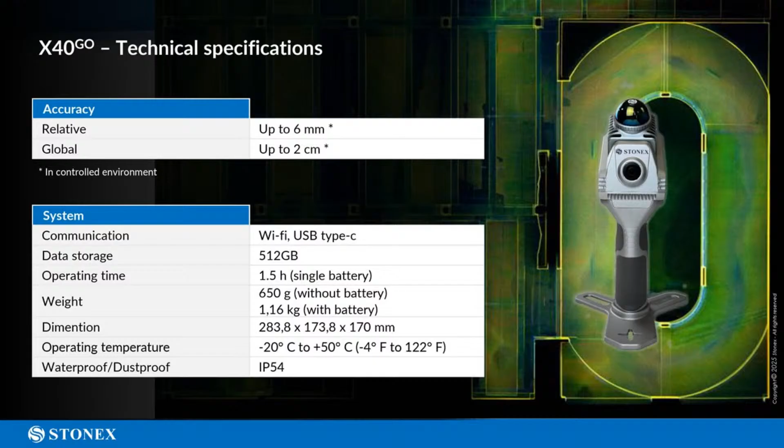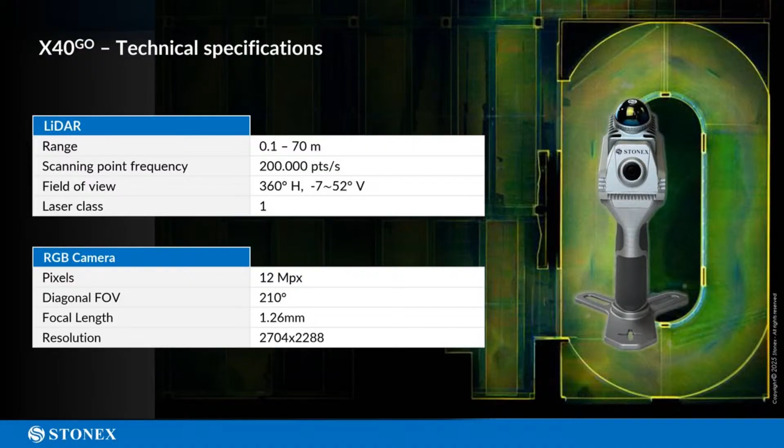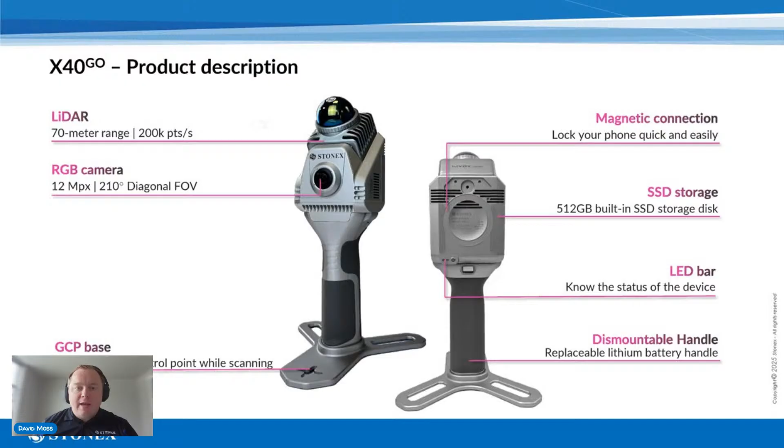So the X40, 70-meter range, and the X70 also 70-meter range - the names don't necessarily mean the distance, apologies for that. But 200,000 points a second. This one's extremely light - our lightest, simplest, easiest to use, weighing only 2 pounds. Colorized point clouds, built-in SSD. The battery, the handle is the battery. All of our units have a little ground control base, so you can tie in any kind of total station or GNSS shots, which is a pretty cool feature. It really ties in the control, and not only references your point cloud, but you can also do what's called a non-rigid adjustment. So say you had 10 total station shots all across - you can actually put those back in, say I know exactly where these are, and it'll redo it and improve your whole algorithm. All of our scanners support that - I can't preach enough about how cool a feature that is. You don't necessarily need RTK on board - there is an advantage to that which we'll talk about - and of course for indoor scanning it's a little different.

200,000 a second - this is our entry level, starting at $18,000, which is very attractive. When I first started selling these things over 5 years ago, the cheapest, at 43,000 points per second, was in the $40,000 range, with a $3,000 a year subscription software. So in 5 years, the entry level has dropped in half, and they're just better performing - simple as that. At that point, the 43,000 one didn't even come with a camera. Wearables had very low density and only about 30 meters usable range. So they're getting much better. If you tried one out a couple years ago, this is rapidly expanding and increasing by the day - super important.

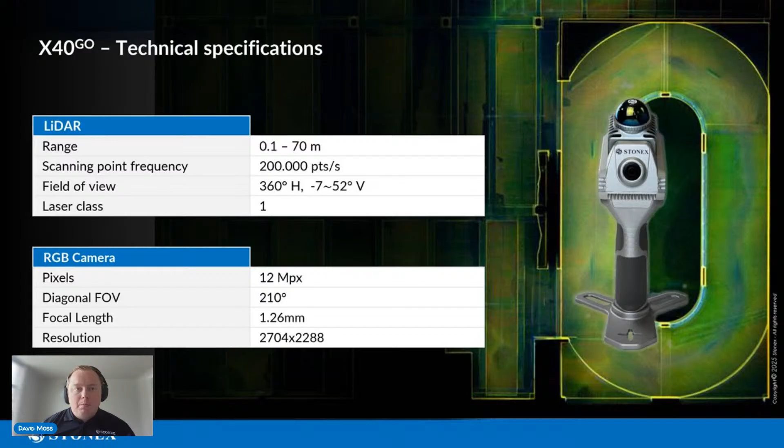So relative, local accuracy is definitely sub-tenths of a foot, and global up to 2 centimeters - we're very conservative on that. You have people preaching SLAM solutions claiming half a centimeter. I wouldn't call that realistic. I'd say sub-tenths of a foot is easy to get, and of course you can get tighter control with other methods, but centimeter level accurate solution, no doubt about it, from all our solutions.

So all of our units have Wi-Fi, you can use them with the app, makes it really easy to use. I mean, 1.16 kg, so a little over 2 pounds. All of our scanners have 512 gigs on board, and that's probably several hundred scans - you're good on there.

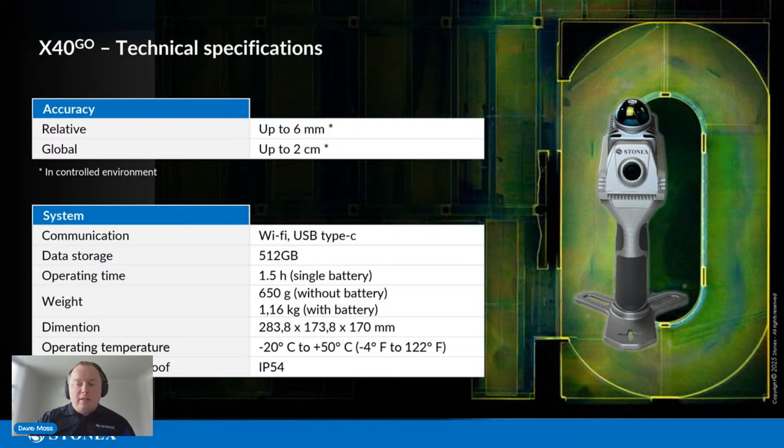We'll go to the 70. So the 40 and 70 look very similar. The 40 is a fixed head solution, the rest of our three are rotating, so the X70 rotates. Same laser, but there's two, I guess three differences. One, the head rotates 360 degrees, so you get a little more, easier coverage. It's spinning all around, kind of nice.

This one is pretty unique in that you can put it a little bit over your head and it's constantly scanning 360 all the time. All these scanners, like the 40, 120, basically everything on the market, are constantly scanning yourself, but they know how to take that out of the equation. On the 70 it's very unique, you put it over your head and constantly get 360. Same 200,000 points a second, but that's really nice.

We also have a second camera for the visual SLAM, so it has two cameras to help the algorithm itself. If you're in a very dark environment you can still use the solution, but it can enhance the algorithm a little more, same color camera. The 70 starts to get into where we can support our RTK module and a couple more accessories than the 40, which is entry level.

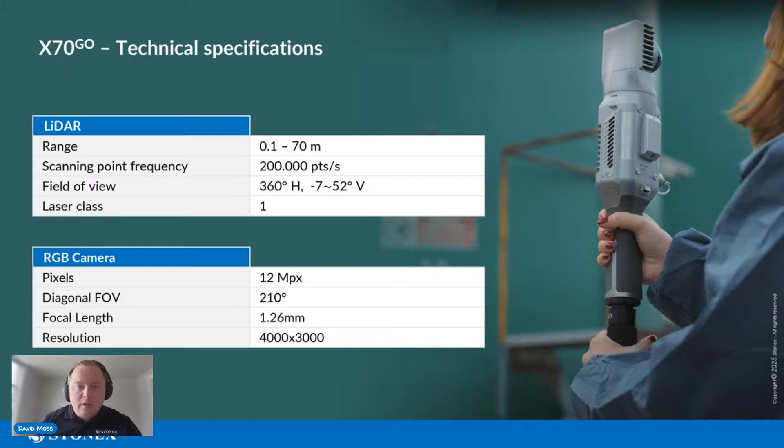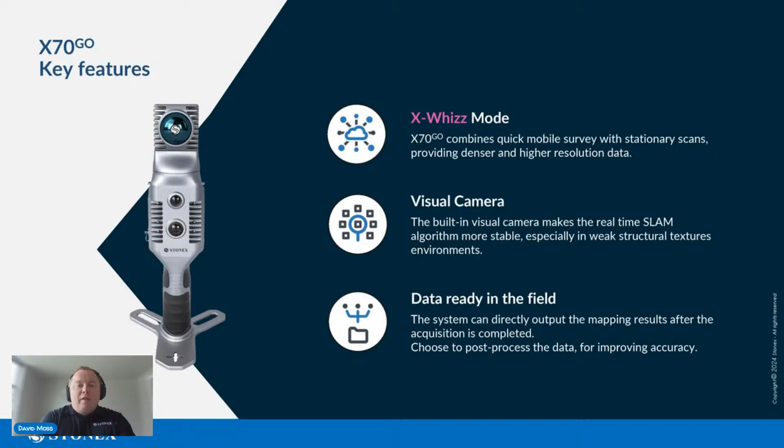So let's go to the next slide. Same head, but very unique in the sense you can stick it over your head. We also have what's called the X-Whizz mode, which is awesome - you can basically do a stationary scan up to 80 seconds long, provides a much denser point cloud. You can have that as a static file, higher resolution data. I wouldn't necessarily say it's a groundbreaking accuracy difference, but if you need really enhanced color of one facade of a building or one entrance, you can set it down for that. We have a tripod accessory that comes with the kit - that's really cool, we'll show that more in a second.

So the 70 rotates around, has the 360, it has the second camera, and it can do the X-Whizz, which further enhances the color and resolution, or density I should say. Same LiDAR, it's a Livox Mid 360.

It's also very important - I can't stress enough about just the SLAM algorithm itself. Most of these things use the Livox or Hesai sensor, so the hardware is not unique. I mean, there's things like IMUs and some other stuff that are important, but it's all about the algorithm. You can have the greatest hardware in the world, but if you don't have a strong algorithm that's going to work in all the environments you need it to, it's not worth anything. Hardware is nice - better cameras, more density, and all that - but if you just have fancy hardware without something to back it up on the software side, it really doesn't matter. We're really proud on both fronts, hardware and software.

So to recap, the 40 and 70 both have 70 meters of range, 200,000 points per second, which is an absolute ton, but in the grand scheme of things it is kind of low density. So with that range distance, I'd say these are more short range, more indoor scanners, a little less versatile. Of course on the 70 we can do the RTK, but then we go into our 120, which features a Hesai 16 channel XT16 sensor.

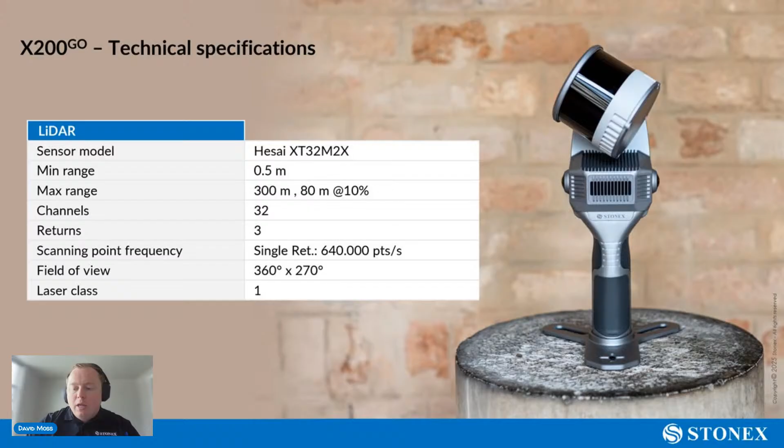Love that. All of our products use a class one eye-safe laser. Nothing on there is going to ruin your phone camera or your eyeballs, nothing like that, just different wavelengths. I'll say there's a new Volvo 3-row electric SUV that has a LiDAR sensor which can actually fry your camera, which I'm having some questions about. So all good here, these use different wavelengths, still LiDAR, but different. It's just enough class one eye-safe laser all around the board.

Same kind of accuracy - I'd say the best accuracy, best density. Our best overall solution is our flagship, the X200. That does drop a little bit on a drone, just from the nature of SLAM being in the air.

This is a better photo of our solution, with the little antenna spot for the antenna you can see.

All of our units have built-in batteries. They're pretty affordable as well. The handles all work for about 90 minutes to 2 hours, but you can keep swapping them out. They all charge on USB Type C, which is very cool, very easy - you can plug it into the truck, plug it into your power bank, and keep going. You probably don't need more than two batteries. Nothing crazy, and you can use your same phone charger, which is great.

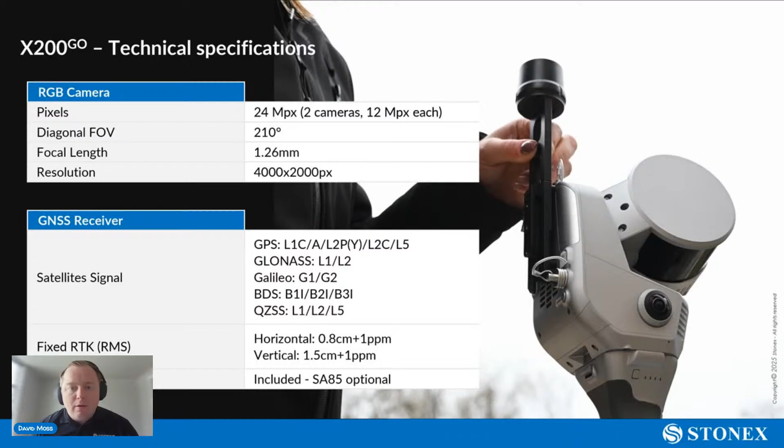So again, built-in RTK GNSS, fantastic, awesome, and the panoramic images - super, super cool. And we even have a better antenna when you're using the backpack configuration.

All of our units have real-time preview, real-time colorization. You can see that in 2D and 3D, which is really cool. So you see your trajectory, you see what you scanned, you can make sure it's all good before you leave - you got everything that you needed.

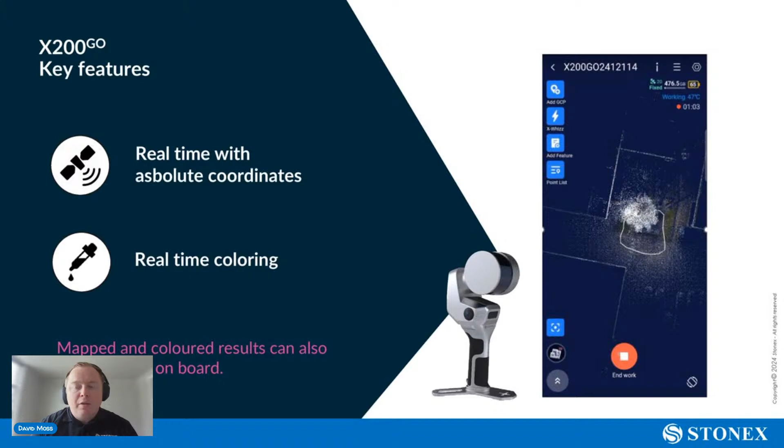On our 200, you can get a colored reference solution right out of the gate - you just take it right off, no post-processing needed. Of course the post-processing will do more of the global SLAM and some filtering and optimization. But if you just want something quick and dirty in the field to see what you got, you literally leave it on for another minute or two, make it beep, and you can pull data off right there - you have a point cloud right there in the field. Super, super sweet.

Again, X-Whizz mode, really cool - stationary scans, anytime you want higher resolution, more density. I mean it's 640,000 points a second. Not as much, but anytime we can get better colorization, why not take it?

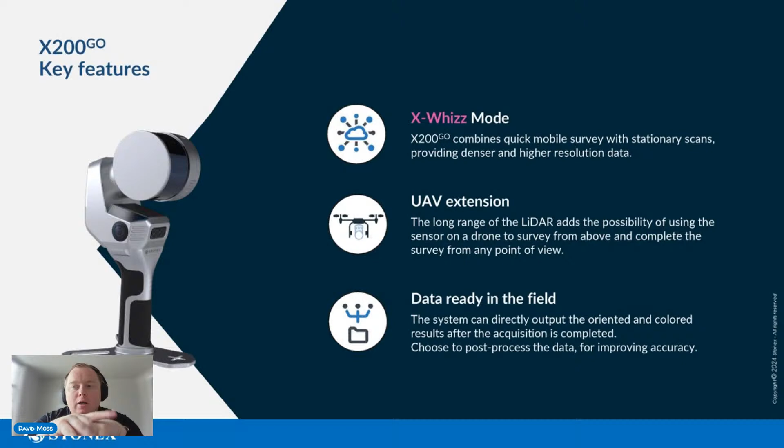UAV - so again, I can't stress the versatility. These things are getting so cool. Drone, vehicle, handheld, backpack, on the tripod, walking around - getting lighter, better by the day.

Another fantastic thing - most of the survey world runs on Android. Pretty much all our solutions are Android based, but what's unique and stands out in a 3D space is all of them work with iOS. So you can download it on your iPhone, use the app preview on there. You don't need a sophisticated data logger, nothing special there. We're not getting you to buy a big survey controller or anything - you can just literally use the ones on your phone. Free of charge, of course, no subscription to anything in the 3D world.

Our post-processing software is called GoPost. Most everything - making your cloud, referencing with the RTK - it's our one-click solution. You just load in the data, one click, say you want color or don't want color. We have moving object filters, so moving cars, moving people - we'll filter that out, and some other things, but essentially it's extremely easy.

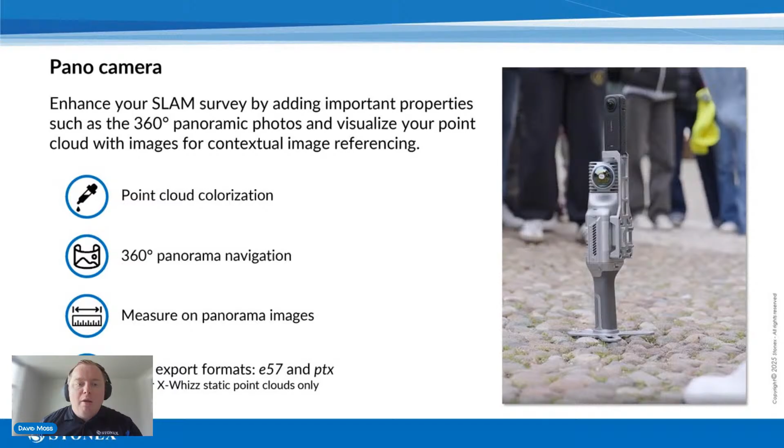So we have X-Whizz, put it on there. Again, we supported the X5 right off the bat, and the X4 - awesome cameras. We also have geotags, which is really cool. If you're not using the 360, or you just want to highlight something, a colorized mobile point cloud is not going to get every little detail. So you can take photos of things of interest and have them referenced in the point cloud and view them in GoPost and other software. That's really cool - a fire extinguisher, for example.

One example that came up recently: they wanted every single door labeled with the room number. Having quick access to that is really cool, and knowing more about the space you're in - any kind of notes you want to take on site in the middle of the scan. It only takes a second, using the built-in internal camera.

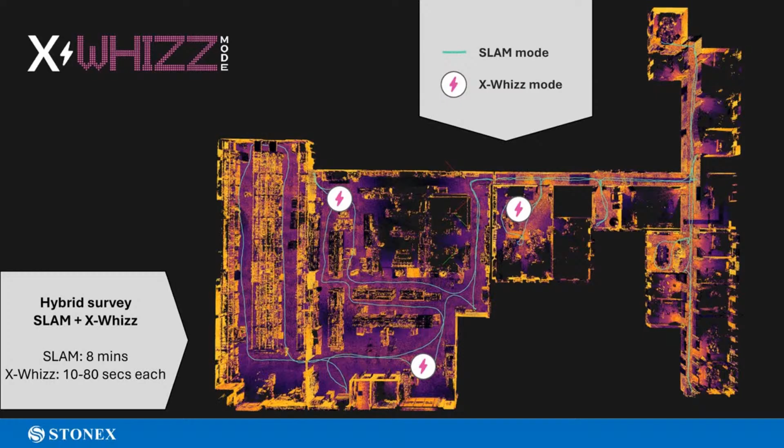Really cool on there - you can see how you can mix X-Whizz, our static mode, with the SLAM. For a whole floor of a building, you're going at say 75% walking speed. The slower you go, the denser it is, but overall for density versus speed, 75, 80, 90% of your normal walking speed works well. You're not walking at a snail's pace - especially outdoors with the X200, you can walk at your normal pace and get great density, great results.

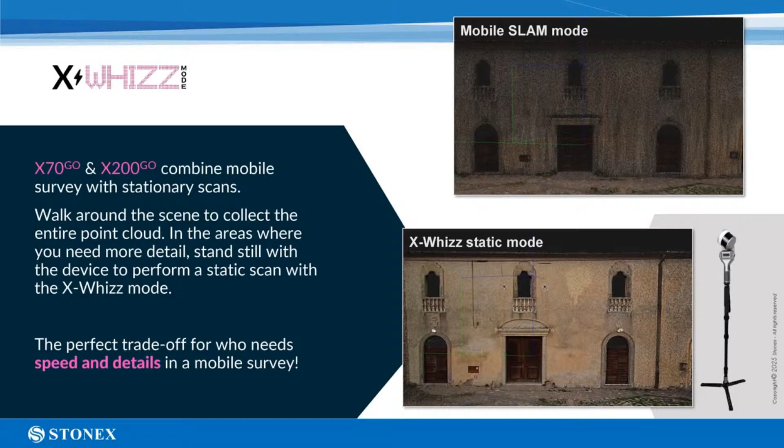This shows the difference between just a mobile-only solution versus the X-Whizz. Our color is actually better than that photo represents, but I just wanted to show how the X-Whizz really makes it pop. So anything that you need - I have the tripod mount if it needs to be mobile.

Our X200 solution can be flown on a DJI Matrice 300 or 350, controlled from the Go app, and we're tying in RTK. We're getting color on the drone with the SLAM, though not the same as dedicated navigation-based solutions like the X-Fly. So it's more of a complementary tool - not a full-fledged drone LiDAR scanner, but more like a SLAM handheld that can also do the drone, among other things.

So, accessories - panoramic camera and all of them support a shoulder hook. If you're doing it all day, especially with the X40 which is less than 2 pounds, it's not really bad for most things, but you'll want the shoulder hook and a tablet mount. I want to stress these things aren't heavy - we're not a 20-pound wearable like some others on the market. We also add a backpack, tripod, and tablet holder, so you can do it all in one.

You can use it other ways, but the RTK module straps on there too. From the 120, same things, but of course vehicle mount too, which is very cool. You don't have to use GNSS with that, but vehicle and RTK - reference, especially outdoors - can enhance the solution, not just reference it. If you get into a not-so-great SLAM area, it can help keep your trajectory among other things.

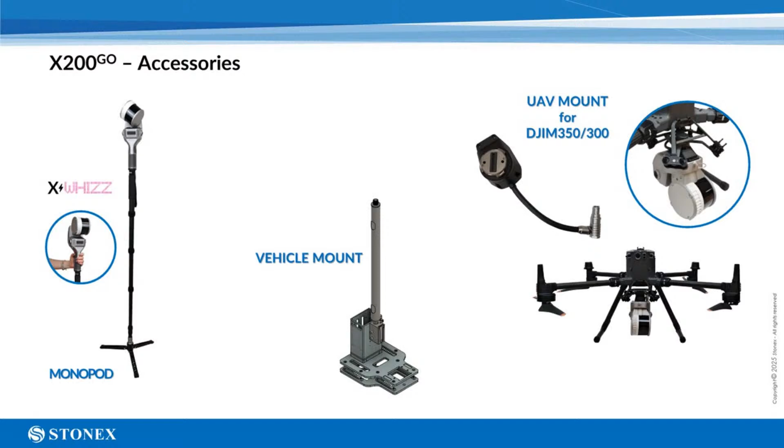But let's say you put the GCPs and all that - we've got that full-fledged, same thing with the X200. Just kind of ran out of space, but we don't need an RTK module because it's built in. The pano camera doesn't support that because it has one just as good built in as well. When we do the UAV mount, we can also do the backpack for here too, with the tablet. Oh, there's the photos - I forgot to put it in. Oh yeah, really cool as well.

We can tie into our radio, so not only getting reference from internet connections - I mean there's things like Starlink and other stuff - but if you just want to run a traditional base rover, we can use our radio as well. Put that radio in your pocket, nice and light. So we have a built-in pano, and you can use the other one in the future if you want, but it's probably a little overkill.

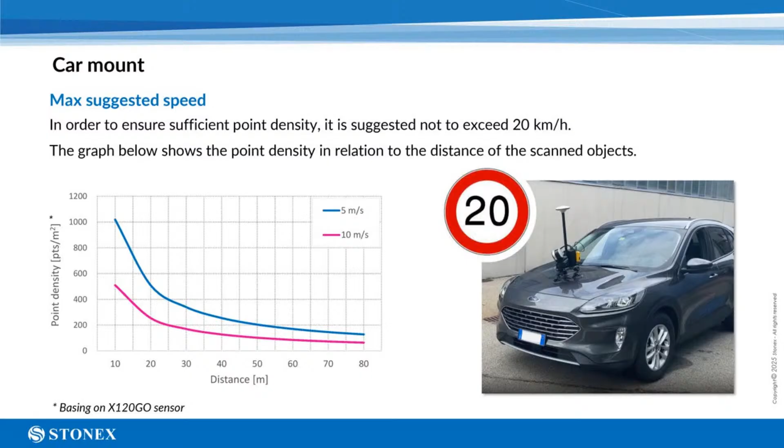On a vehicle - we talked about these things being used at walking speed normally, but on a vehicle you want 5 to 10 meters a second, 10 to 15, 20 miles an hour, 20 kilometers. That's what you want to keep it under for the sake of density. That's based on the 120, so it's a little faster than the 200. So to sum things up: the 40 and 70 are more indoor, while the 120 and 200 are more versatile indoor and outdoor solutions with more accessories.

We all have storage, a bunch of storage there. Our 200 has a built-in RTK receiver, our X-Whizz has a better colorization mode, built-in 360-degree camera, can be flown on a drone or used as a scanner on a vehicle. RTK ties into any kind of survey nail or target, total station, or GNSS. We can get simple point clouds right off the scanners - of course you'll probably want to post-process for most things - but it's really easy to use, and it comes with a fantastic, strong SLAM algorithm that we're very proud of, plus free software to boot.

That's a lot there. We also have other solutions we'll talk about in a moment, but just more about the accessories - basically to sum it up: indoor/outdoor versatile with the 120 and 200, more indoor or close-range outdoor with other solutions. We're starting at $18,000 with software, end user price. So fantastic there - so which one should I use?

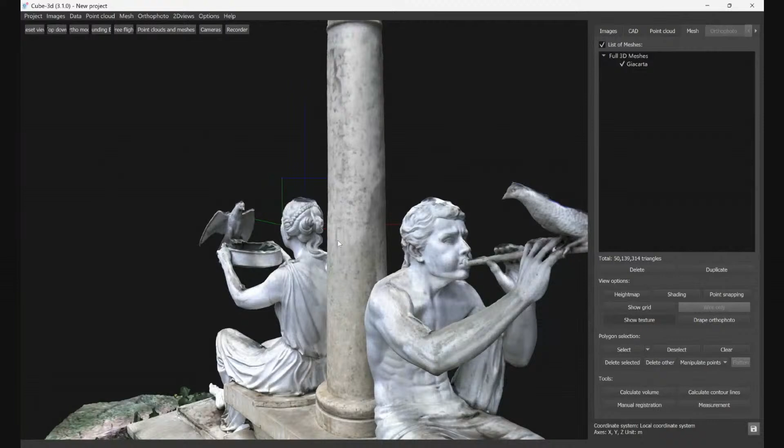I'd call this a complementary tool rather than a replacement for a mobile or terrestrial scanner, because it's more for close range, things like this, due to the nature of visual SLAM. It can't hook onto flat objects — things like mirrors can mess it up, blank walls, that sort of thing. You have to use it in a well lit environment, unlike a regular LiDAR SLAM scanner.

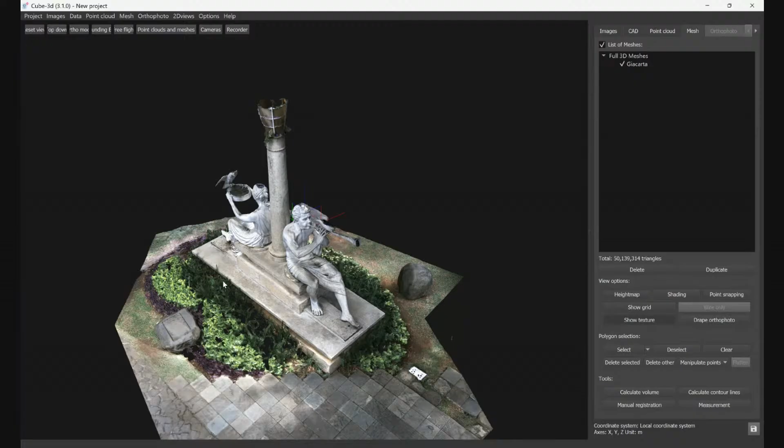You can use it in an underground pitch black mine. You can use it at night. The data itself isn't affected. So that's where I call it complementary.

But look at this, it's crazy — nothing to it. Walk around one time, tie in the targets to survey control to get it to scale, and it's just insane. You can use this for facade reconstruction — you just need one facade of a building for extra color. There's a ton of uses here for showing off our SLAM solutions.

I did this in under 5 minutes with all of them, all of our three SLAMs. On the 200, I did this one last, so you'll see a little bit more of the shadow.

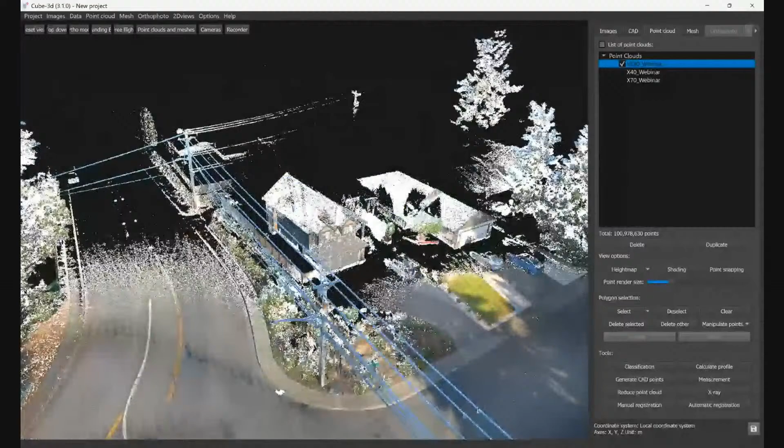This was done at sunset, but we're getting our curb — good curb data. Again, this is within 5 minutes and we captured all this. This is a huge intersection with multiple houses. We got the power line on there too.

So power line survey, especially with the RTK — grid solution. We're actually talking further than that, but compare that with our 40 solution. Again, the shadow is there just because I was doing this at sunset, but you can see the density is a little less, color not quite as good, but still usable, great data.

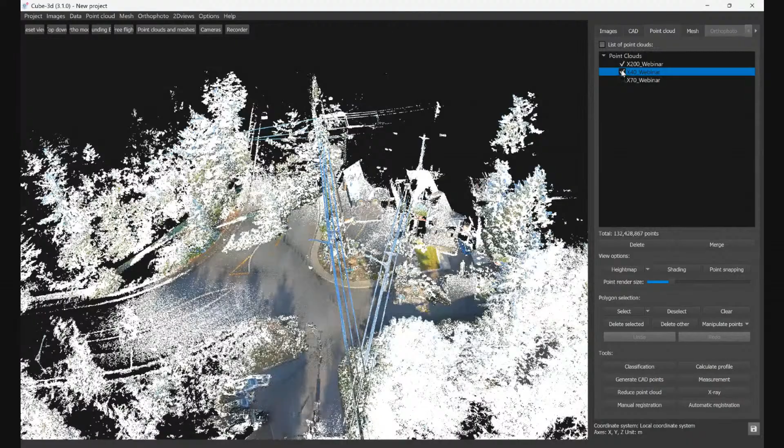But you can see on the 200 data it's a little more crisp. And you can see we're getting so much more — compared to our 200, see how much more room we've gotten basically. Nice. But we'll go back to our presentation.

So again, the vSLAM killer solution — this is super unique. You can process all the images. You need to demo this. If you have a mobile scanner that you're happy with from another company, you do not have an XVS though.

Fantastic global shutter, no distortion — beautiful results that are easy to achieve to scale. At $15,000, it's very attractive, a super killer combo. If you combine this with something like the X40, you're under 40 grand with everything, with software, even Cube 3D, and you can do so much with that. You can be crazy dangerous with two solutions more than what you had before with just one.

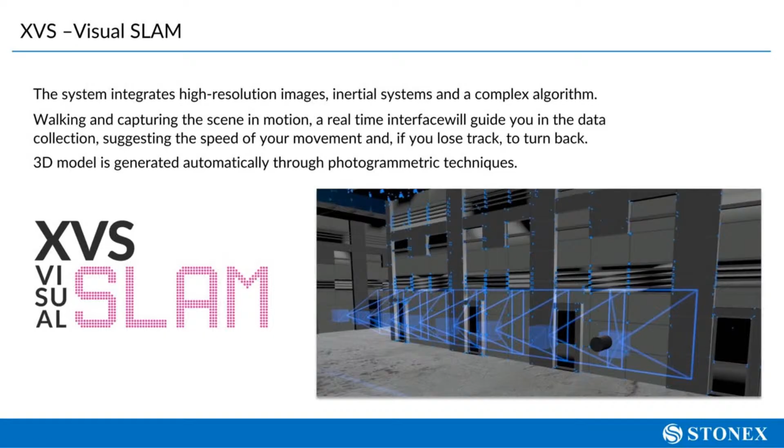We also have a drone only solution, or I guess you can use it on a vehicle as well, but it's a navigation-based system. We've talked primarily about SLAM solutions so far, but we also have a navigation based one, which is pretty cool — this is an extremely attractive product.

We're super proud of this solution, it doesn't get talked about enough — 24 megapixel sensor. For drone-only systems, we have the X120 and X300. The X300 has the same sensor as the X200, both having 300 meters of range, but up to 1.9 million points per second, with a great, super strong IMU.

Definitely excels. Night and day difference from your entry level solutions, and this is still at an attractive price. Compared to DJI L1, L2, this is a huge player, huge component. We can compete with anybody in this class.

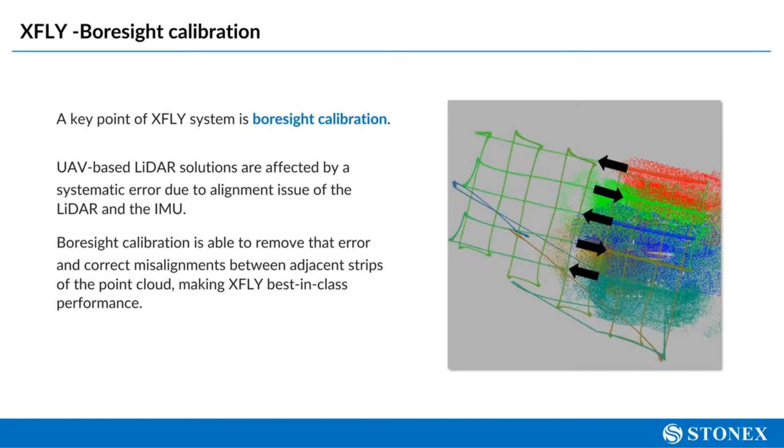And that's just from the laser scanning 3D perspective, but we have a full-fledged GNSS lineup, total station, and all the software to boot with that. We have an option for literally everything that you can want. We're rapidly expanding all that machine control as well and tying it in. So we have a solution for everything.

So in there, we also have our own entry level TLS scanner as well. Proud of that. Just mobile scanning is the focus, that's just where the market is going, the rise, but we do have that. There's just some scenarios where you need a tripod base, so we have a great solution there.

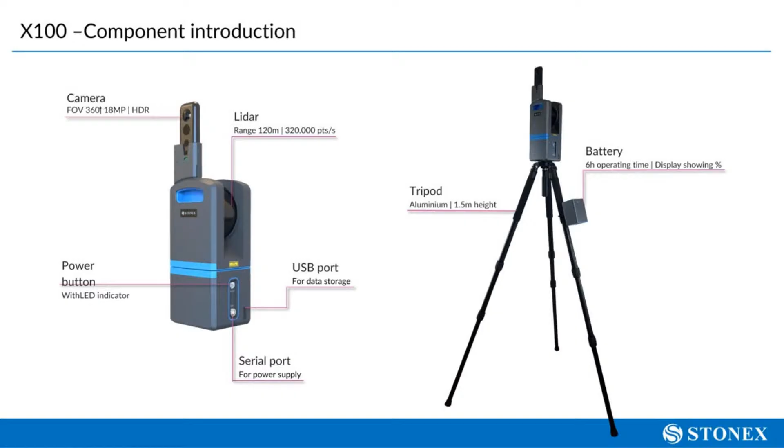X100, very easy to use. It has self leveling, so you don't have to level it every time. Total station, awesome, great, 320,000 a second. Super killer data, going to produce a better result than our mobile, but comes at the cost of individual setups.

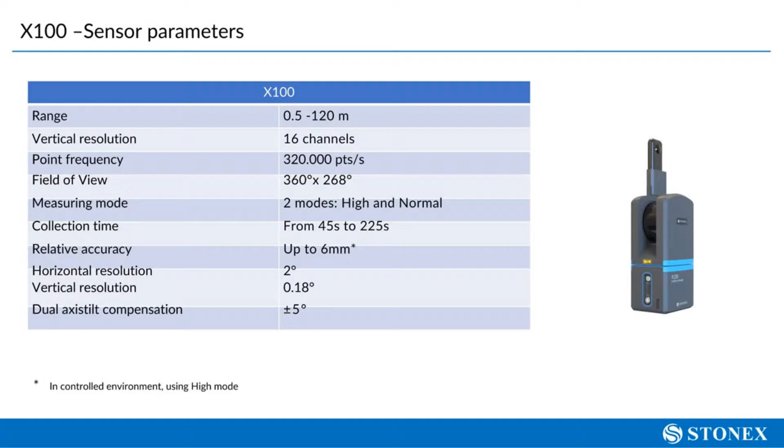So we have registration software, that's called Reconstructor. But we have TLS, we can tie that in and work with the rest.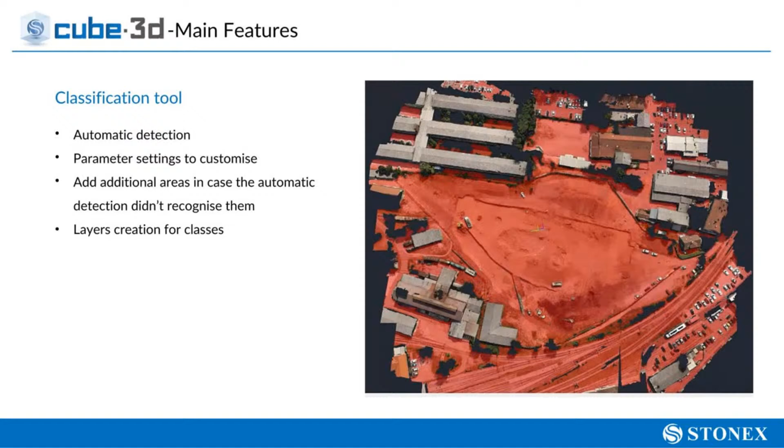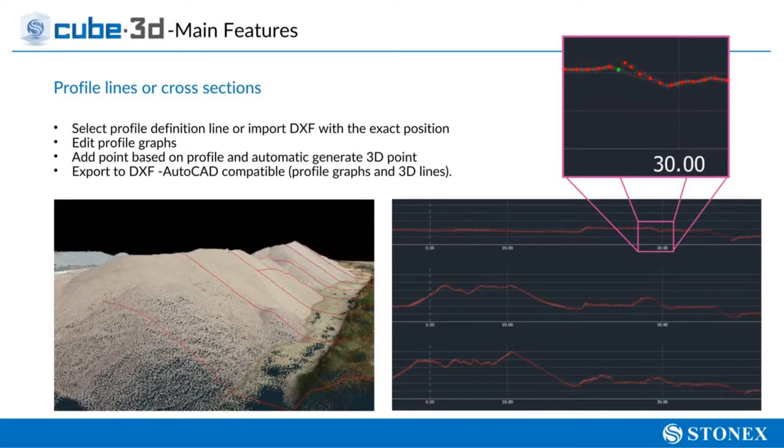All local, all secure. But from Cube 3D and the LiDAR sector, we have classification tools, auto ground, all those layers, any kind of classification you can want, full gambit contours and such, have CAD layers, exporters DXF, any kind of profile lines, cross sections, you name it. This is a full-fledged post-processing software, super proud of it, CAD engine.

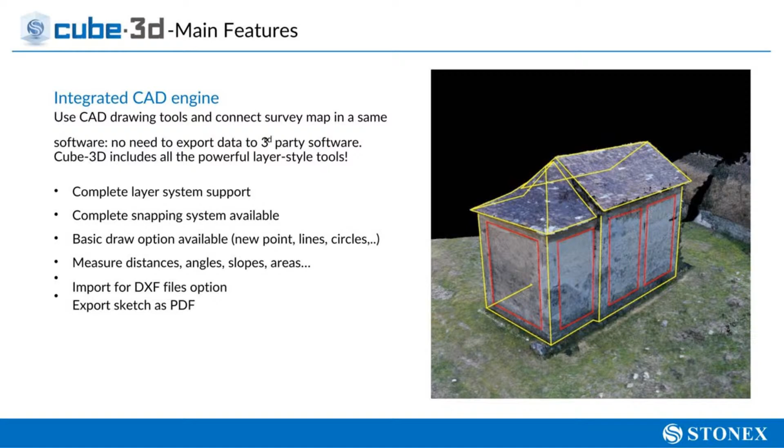Take out another software, you can do measurements, you can do a whole bunch: volumetric, cut or fill, manipulation tools. And this can be done with photogrammetry or LiDAR or combined. You can combine laser scans here, say you had a drone scanner, tripod scanner, and a mobile, even all three different manufacturers.

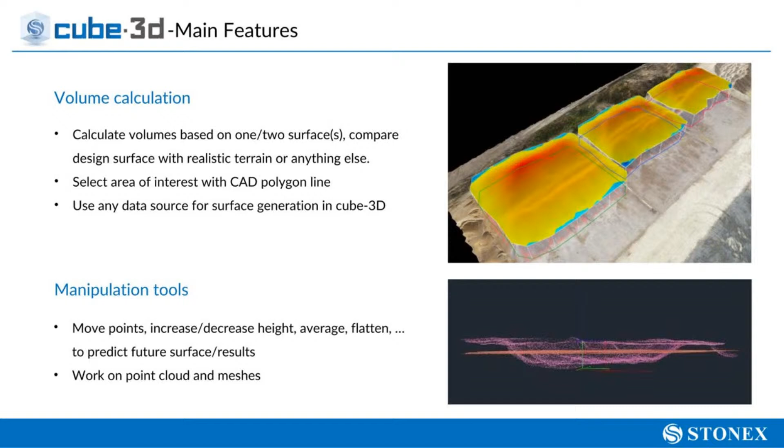You don't have to necessarily have Stonex equipment to use this software. You can work it all in there, no problem. Custom planes and the X-ray, which is really really cool. We have killer solutions. We're at 52 and I'm trying to go to the hour.

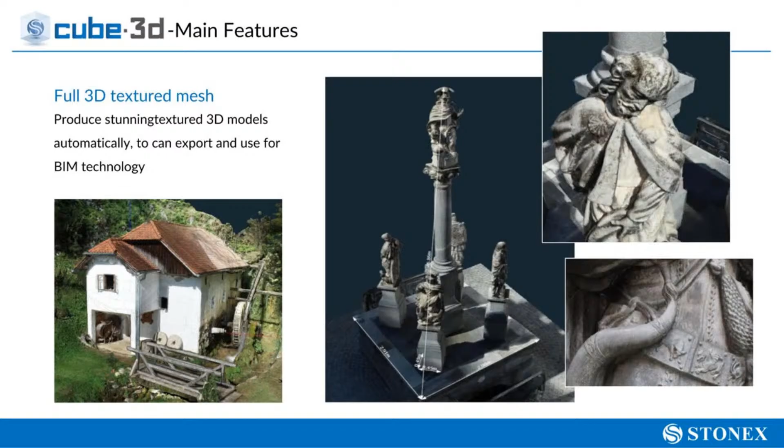So I've talked a little bit more than I wanted, so we will rush through that again. We have the full-fledged, over an hour webinar on that. 3D meshes you can make, photogrammetry, really cool, just like what we saw was made in Cube 3D when I showed that for the XVS. But mesh break lines were made with Cube-a survey software.

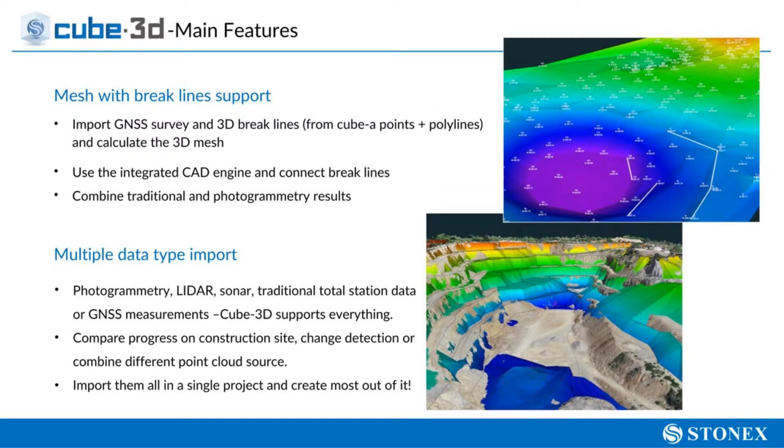You can import points from there. Photogrammetry, you can work with a whole bunch of data: aerial images, videos on your cell phone, total station points, GNSS, point clouds, surfaces, images, you name it. Look at all the ways you can export it as well—contours, CAD, volumetric, anything. This software does it all.

If you're just looking for just photo or just scanner, you don't have to buy the full-fledged Pro package to get everything. You can get what's tailored to you and upgrade over time, which is nice. We have a perpetual license you can get, and you can bundle it in. We always run promos at a lower cost when you're buying the higher hardware too, but again, you can use any hardware you have.

Photogrammetry, full-fledged solution that can compete with anybody: GCPs, classification, registrations, make the meshes, orthos, CAD, volumetric cross sections, you name it, you can get it all in there. A photos module, scanner module—the Pro gets you both, at a discounted rate.

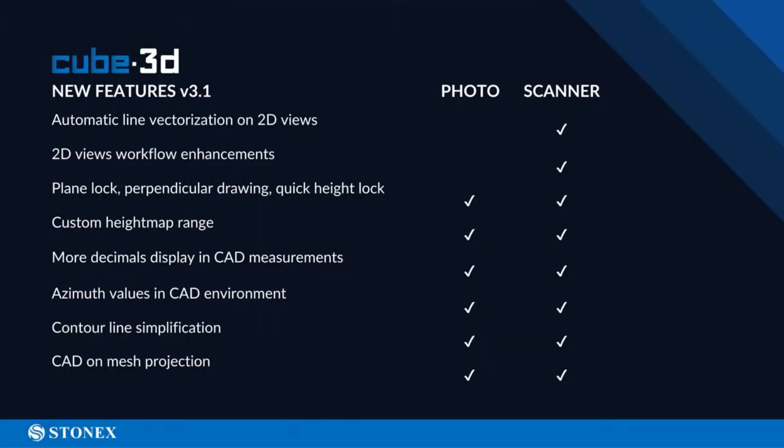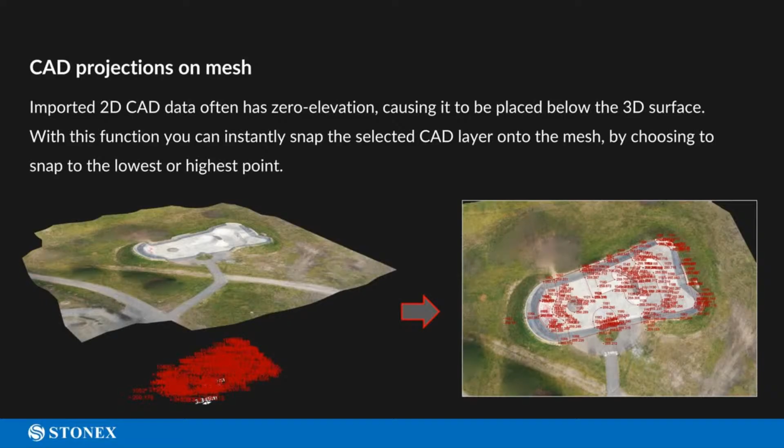Our webinar is mainly on our new 3.1 release, but we will go over the full Cube 3D. We have some new tools we'll go over one by one: line vectorization work, 2D, a whole bunch of new CAD stuff that just came out in the last week or so. A whole bunch of improvements, custom heights now—we're constantly improving that, updates multiple times a year, so we're super there, easier contour lines.